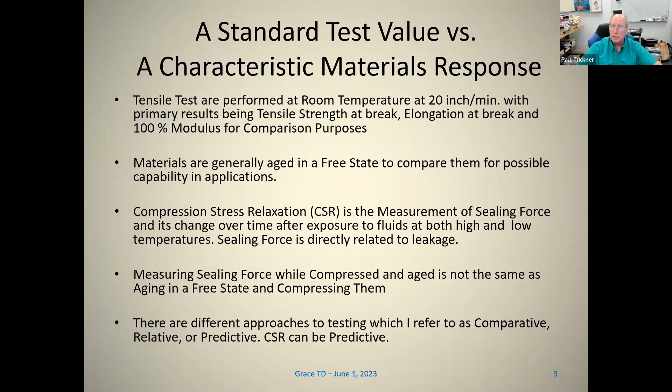One situation I'd like to raise with respect to static sealing, and I've worked in this industry for about 30, 40 years, is a static sealing perspective: you get a different perspective depending on who you are, whether you're a rubber chemist, a seal design engineer, an application engineer, or a materials engineer. Walk into a room, how would each approach a static sealing application or problem? And they will be different.

So I've worked as a rubber chemist and an application engineer and a materials engineer, but never worked as a seal design engineer, but worked with some of those people. So I know each of those people have a different perspective when it comes to sealing.

When you look at compression stress relaxation, there's two primary kinds. One is continuous CSR testing and the other is discrete CSR testing. The simplest version of continuous CSR testing would be testing with a load frame and an environmental chamber, or you can use a continuous CSR tester that has separate cells that you can put in a temperature chamber, and I'll talk about that specifically.

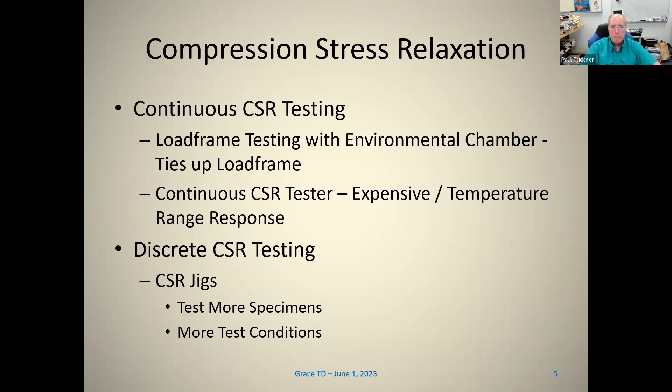And then you have discrete CSR jigs where you put a specimen inside a jig and you test them at specific intervals using different techniques to note how that sealing force changes as a function of time. One advantage of discrete jigs is that you can test more specimens under more conditions as compared to the other ones.

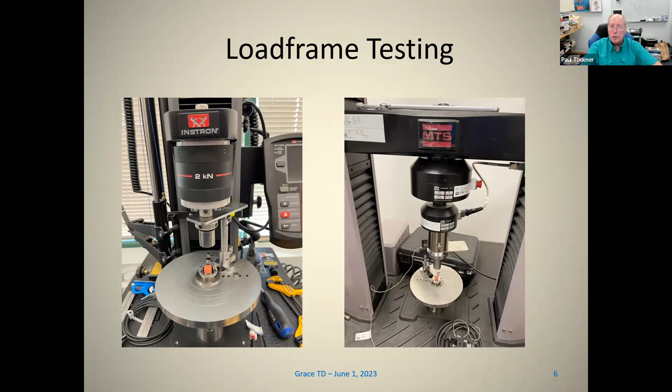Now this is a typical load frame setup in my lab. I have an Instron and an MTS machine. And if you wanted to compress a test specimen on a pedestal like that, you could do that and run the test like that. If you had an environmental chamber around those configurations, you could do it at different temperatures also.

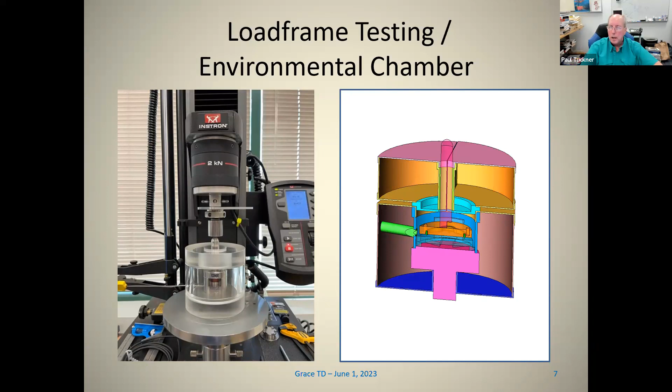Here's a case where I've developed two small environmental chambers. One is actually a high temperature chamber where you can take a jig and put it in this chamber. It's an insulated quartz chamber, and then do load deflection curves as it's cooling down, and I'll show that in a second. The other is a controlled temperature chamber that has conditioned air fed in, and then you can check the sealing force on the seal in that configuration. And that's also a configuration you can use to check for leakage, and I'll talk about that in a second.

So here's another picture of the high temperature chamber where you would take a jig out of the oven, place it in the quartz chamber, insert a thermocouple into the CSR jig, put the indenter pin in, and just run the CSR test like you would normally at room temperature. But if you can monitor the temperature as the jig cools, you can do load deflection curves and then determine what the sealing force is and see how it changes as a function of time.

This is a picture of the temperature chamber where I did a study and actually evaluated the difference in percent sealing force versus percent compression over a low temperature range. So the material was put in there, it was compressed at room temperature, allowed to sit for 30 minutes, and then it was cooled down at a given rate to low temperature to note the sealing force. And then the inside of that chamber was pressurized with air to note when there was flow. So there was a flow sensor in there, so you could tell whenever there was leakage, the flow would begin to show.

So what it shows is that at lower compression, not only do you have lower sealing force, but you actually lose sealing force at a higher temperature. So it doesn't seal to as low a temperature as it does at the higher compression. The other thing it shows is that the leakage occurs at the point where the effective sealing force is zero. So you can see that in each of these cases the leakage occurs when sealing force is lost.

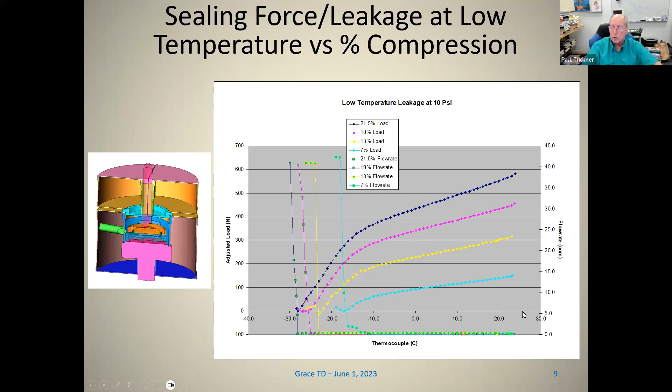This is a graph that I put together that I call the viscoelastic response cycle. And what it really does, it shows what happens to sealing force if you're doing continuous readings and the related discrete readings that would come in. So in the first part, if you take a specimen and you compress it at room temperature, it would be a simple compression up to a given point of strain.

If you hold it at that point of strain, then you see the relaxation curve. So in the relaxation curve over a period of 60 minutes, you would get to this point. So after 60 minutes of relaxation, that value is the initial value used if you're doing discrete CSR testing. Then if you were to heat it up to elevated temperature, you'll see that the sealing force will increase to a point.

When you stabilize at a high temperature, it'll begin to show relaxation at that point. And then if you cool it back down, you'll come to a point which will have a sealing force lower than your initial drop that you had with the initial relaxation. And this has to do with the high temperature relaxation that occurs just from exposure to the high temperature.

And this value is something you can test with discrete jigs by, after you do the initial sealing force check, you can put it in the oven for 1 hour, take it out, allow it to cool, and then check the sealing force again. So whether you do this continuously or do this with discrete jigs, as long as you follow these same positions, you should get the same number.

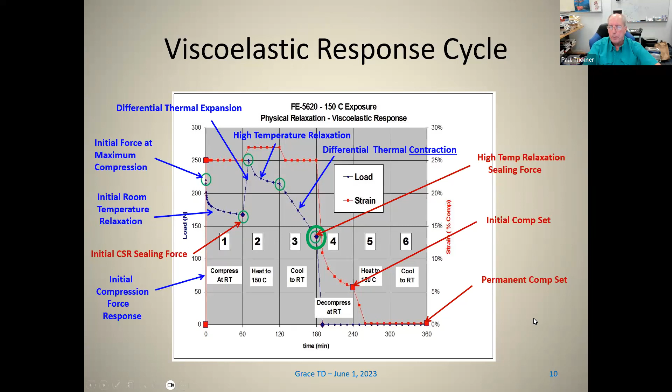One of the things that people don't understand or don't talk about is what I call differential thermal expansion and effective percent compression. So if you look at some of these configurations, this is considered a series compression, and this is a thing called statically indeterminate. So if these two are locked in position and you heat this up, what you'll find out is the stiffer material will compress the less stiff material, and you'll get a value. And this is a parallel constrained configuration where you're working with two of them.

Now, if you actually do continuous testing, you typically have a series constrained configuration. So the amount of compression that actually occurs here will depend on the length of the compressing surfaces, their stiffness, and their thermal expansion. In most applications for sealing, you really have a parallel configuration, which is what you see in a discrete thing. So you have to understand that if you're doing continuous versus discrete testing, you might not get the same values unless you have matched thermal expansions and distances to compare.

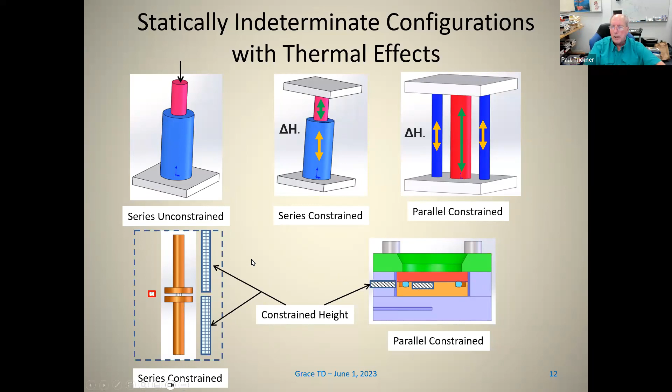Now, for continuous testing, this would be a standard test piece of equipment. This is the Elastocon, and they have newer ones now that have more cells. So this one has 3 cells. They have ones that have more cells. This is just a heated controlled chamber. They now have ones that can both heat and cool. And one of the advantages of this is that you can follow multiple specimens over a temperature range up and down, and it gives you really good values.

For discrete jigs, there are several different ones, and the first one I was familiar with was a Lucas stress relaxometer. And that was like in 1980 when I first saw that. And that used an electrical contact brake configuration. And then later on, I got involved in the Shawbury-Wallace, both the tester and the jigs. And now they have the Wallace tester with the Wallace jigs with the new tester. And those are both electrical contact brake.

Then there was the Wykeham Farrance jig, which had its own tester. And then there's the Jones-Odom jig, which Ford was using some time back, and the JMAC jig, which Chrysler was using. And then I developed Grace Technology jigs and fixtures when I was at Dyneon 3M at the time. And that can use both the electrical contact and load deflection.

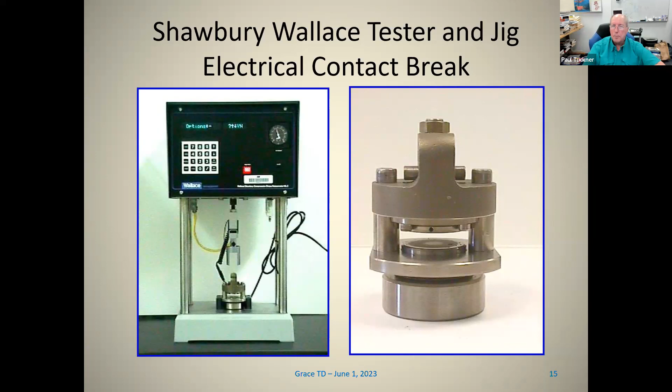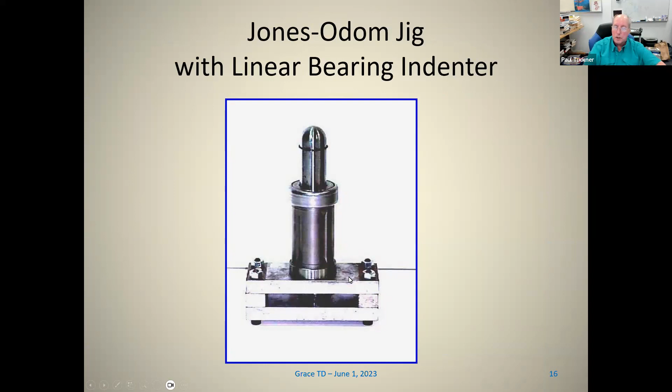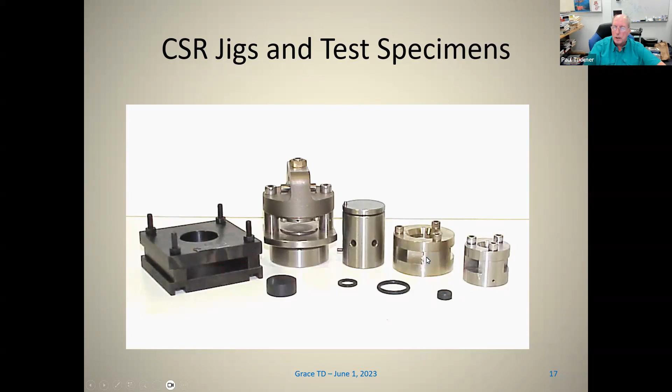So by comparison, this is a newer design of the Jones-Odom jig, but it's still pretty large. This is the Shawbury-Wallace jig. This is the JMAC jig. And this is the Grace Technology and Development O-ring jig. And this is the ASD jig. So you can see that as you work from left to right, you get smaller jigs and you can test different kinds of specimens.

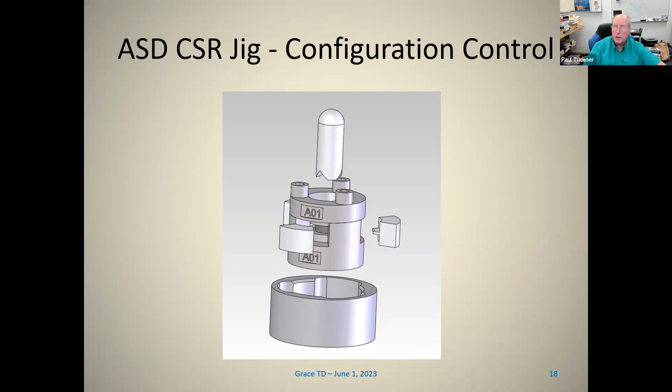So one of the unique things about the ASD jig is they use a centering feature which uses wedges and a centering cup, which centers both the shims and the specimen in the jig, which is important. And then I developed an indenter pin, which has a tripod base and a hemispherical head, and it's hardened so that it works really nice to accommodate off-perpendicular loading in your test configuration. And nobody had really done that, and it really makes a difference in the quality of your load deflection responses.

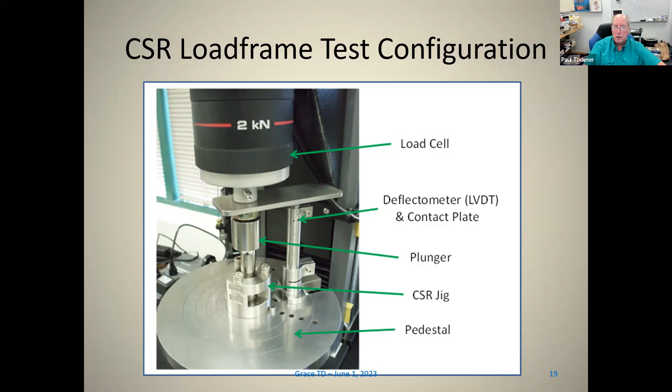So one thing you get out of this is if you take the ratio of the system stiffness and the sample stiffness, which are the slopes of the two, you get what's known as a stiffness ratio. So what I say when you do CSR testing is you want to have a stiffness ratio that's greater than 5. And if you have a stiffness ratio that's between 2 and 5, then you need to note that. And depending on how linear your response is and the quality of your inflection region, you may be able to say that, okay, this is good and I still have a valid value.

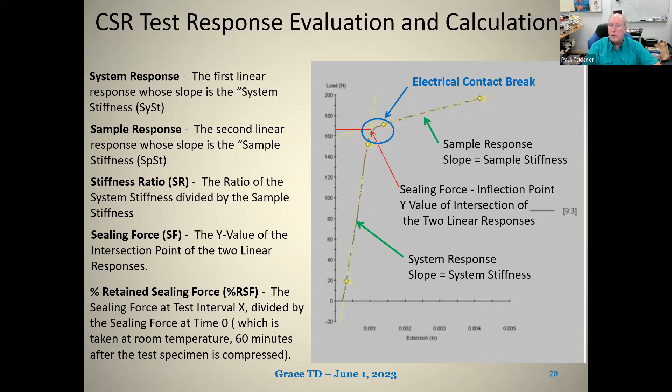If the stiffness ratio is less than 2, I say that you can't really say with any certainty that those values are correct. And so if you're doing sample stiffness and you note that over the test period, you can see that the sample stiffness may change. Some materials that age by diffusion-limited oxidation will have an increase in sample stiffness over the testing period. Let's say if you're doing nitrile testing aged in air, you'll see that sample stiffness increase. And at some point during the testing, you may find that your stiffness ratio gets too low that you can't see an inflection point. So having a good load deflection curve response and knowing what that means is really important in getting good CSR results.

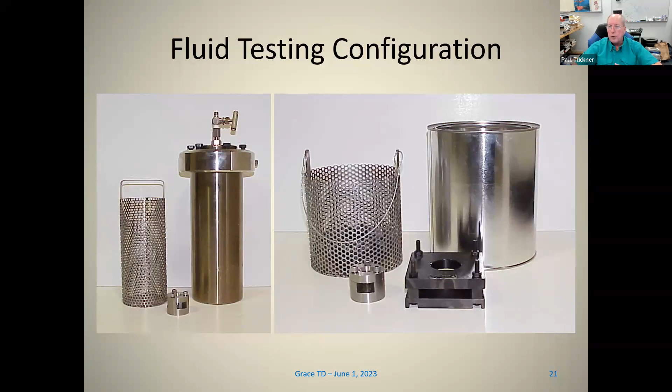controller, when you come to the time intervals, you cool the vessel down, you pull the basket out, and then you let all the fluids drain back into the vessel. And then you can pull the jigs out, wipe them down, put them in front of a fan and cool them and run the CSR test. So it's a real efficient and effective way to do CSR.

The biggest thing about CSR testing is that you can't get any better quality of results than the quality of your load deflection curves. And I've seen some cases where the load deflection curves are really bad. They're not linear, they're curved, they have peaks all over the place or things like that. So you can't trust things like that. And I'll talk about that later about quality of the test system.

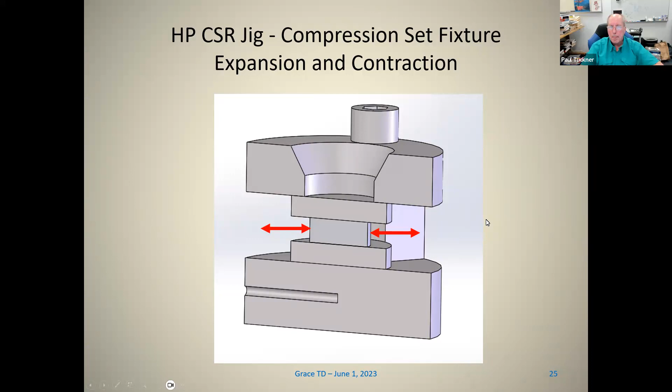So one thing I developed along with CSR testing is actually 4 different compression set values, which give you some additional information about what's happening in the CSR test. So the first one I did I call the shim set. And the shim set is where you remove the specimen from the CSR jig in contact with the shims, and then you measure the thickness of both the shims and the test specimen, and then you subtract the thickness of the shims to determine what the compressed thickness of the specimen is in contact with the shims.

Then at that point, you separate the shims from the specimen and note the adhesion that you have, because that's important. And then you let the specimen sit for 30 minutes at room temperature to recover. Then you measure it at that point. And then you put it back in the oven at the test temperature for 60 minutes. And then you take it out of the oven, let it cool back to room temperature for 30 minutes, and you check it again.

And that's what I call the permanent set, which is a standard compression set kind of test. And then what you do is you take a digital caliper and you measure the thickness at the edge of the specimen. And that's what I call the edge set. So for materials that age non-uniformly by diffusion limited oxidation, you find that the edge set is greater than the permanent set. So it gives you some indication of the uniformity of degradation.

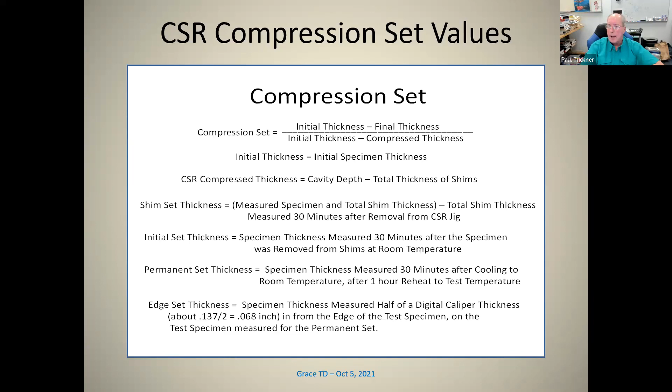So all of these 4 different compression set values are useful to give you some information on what's happening with the specimen in the CSR jig. So what you can do is you can do this at the end of the test, but if you want, you can add additional jigs you can take off test at the different intervals. And when you do that, you can see the progression of all 4 of the different compression set values. And you can do that along with the CSR testing you do, because you'll have more additional values.

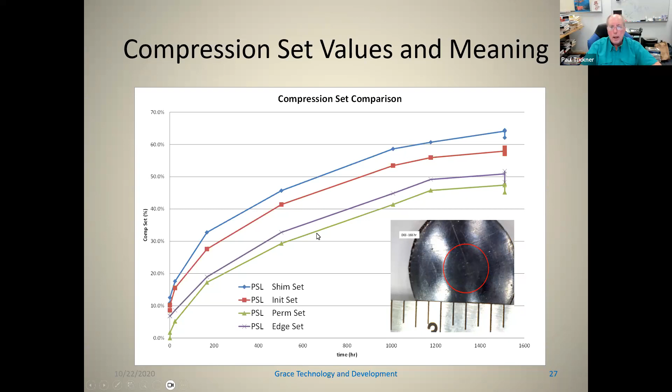So you'll see that the shim set is the highest, then the initial set. And then what you'll find is that the edge set is typically higher than what the permanent set is. And then if you take and plot the shim set and the permanent set values against the CSR values, you can get a linear regression, and you can see that for the shim set values, the intercept point is near 100%. So it shows that when your shim set is 100%, it coincides with 0 sealing force. So being able to have both of these gives you some information on what's happening. And sometimes if the degradation is not uniform, it skews some of these values.

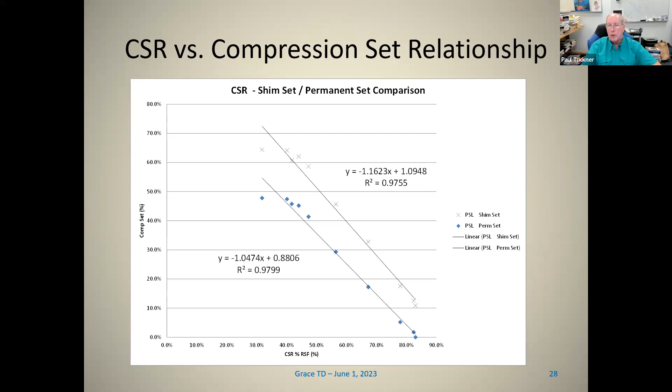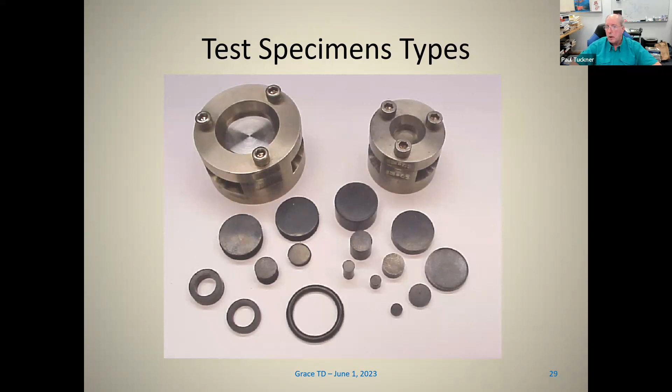Another thing you can do is you can do configuration testing. So this is some work I did about 20 years ago where I evaluated different size specimens and shapes and compared them. So you can look at the effect of size, shape, and percent compression on the CSR response. And in this case, when I was doing FKM testing, I showed that specimens with the same shape factor, which is a ratio of diameter to thickness, they all had the same retained sealing force. And specimens that had high shape factors, which were large diameter, small thickness, had poorer retention of sealing force. And the ones that were taller with smaller diameter had better. So it gives you some idea of the effect of shape and size on that.

Additionally, you can do the effect of percent compression to determine the optimum percent compression. So in this case, it shows the percent retained sealing force, and it shows that at low percent compression, you get lower sealing force, which makes sense, but you actually lose it faster. In that intermediate region, you have the best retention of sealing force. And at high percent compressions, you have higher sealing force, but you lose it faster. So at some point, you end up having less sealing force than what you would at an intermediate range. So from that, it gives you some idea of how to optimize percent compression. And that depends on material, max temperature, and fluid exposure you're dealing with. So each of those will affect that.

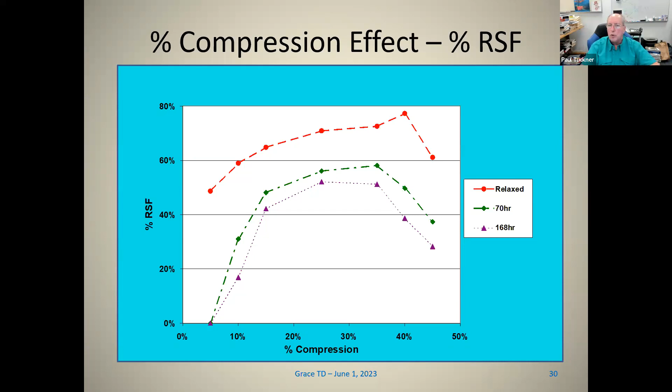The third thing is mode of degradation. So in this case, I noted previously that if you had specimens that had the same shape factor, but different diameters and heights, you should get the same percent retained sealing force. But in this case, with some orange HNBR specimens, you could see that they degraded from the outside in by turning black, but it's a larger percentage of the small one than it is of the large one. So you'd find that the percent retained sealing force was best for the larger specimen and worse for the smallest one.

And if you did this same thing with O-rings, you'd find that O-rings of the same diameter that were thicker would have better retained sealing force than ones that were thinner. If you had a material that aged uniformly, you'd find that the values are pretty much the same. So it's really important that you know the mode of degradation and how it affects percent retained sealing force. In this case, you could see a button that was actually domed in the center. So you could see that the edge set was much higher.

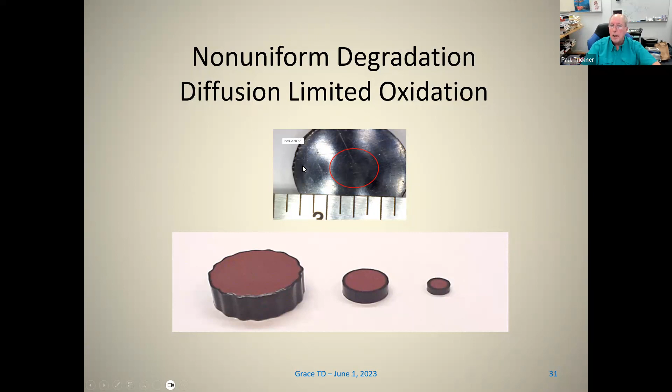When you talk about CSR test standards, there's pretty much three primary standards. So there's ASTM D6147, and then there's ISO 3384, both part 1 and part 2. And then there's SAE J2979. Of these three, the J2979 is the only one that actually tells you how to determine sealing force.

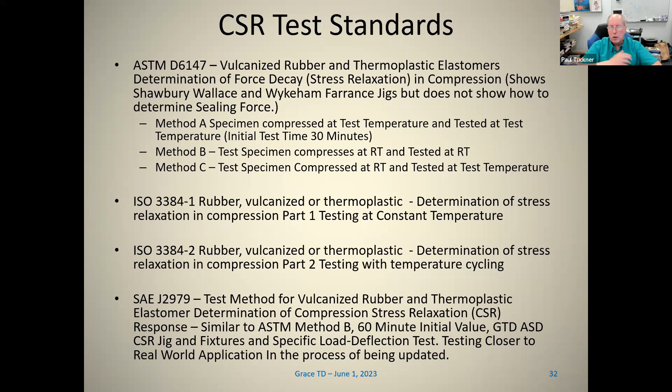And again, I want to reiterate the difference between a standard test value versus a characteristic material response. I developed a concept a couple of years ago, which I call precision CSR testing. The quality of the CSR results will depend on the quality of your CSR test system and its limitations. So these are some of the questions I discuss. Is your load frame or CSR tester capable? And there's approaches that I use to look at that.

And is your test software capable? I use a certain approach both with MTS TestWorks and the Instron Bluehill 3 that works very nicely. And are your load frame fixtures capable? Are your CSR jigs and test fixtures capable? Is your procedure capable? And are your test engineers knowledgeable?

A lot of times test engineers are responsible for the CSR testing, but they don't do the testing. They have technicians that do it, and they may or may not give them the information they need in order to assess the CSR properly.

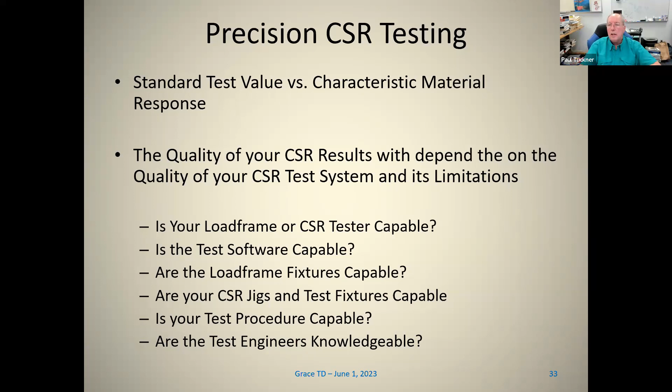The people that deal with CSR are people that are concerned about long-term performance under high temperature and fluid exposure conditions, where failure can result in high cost or loss of life. And it has to do with trying to understand the capability and service life of not just the materials, but the designs they're using. It's primarily used in automotive for GM, Ford, Chrysler, and aerospace.

I've done work with Wright-Patterson Air Force, UDRI, and the SAE committee. And then in the oil and gas business, I work with Baker Hughes and Schlumberger and a few other people. Semiconductor, which is a huge thing that I don't think really uses CSR right now, but when they're doing fab situations, if they get a leak in the fab and they ruin a whole big disk, it's very expensive. And then in cases where there's industrial applications.

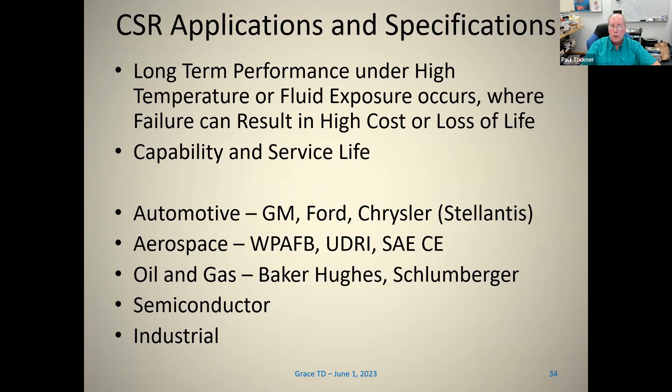So the things that I look at for CSR is not just the testing, but testing in a way you can integrate material properties into design, to define capability and service life. So you're looking at the full material response in compression, the characteristic material response, which is the stress strain response, being able to differentiate the viscoelastic response from degradation effects. Usually the first change in sealing force is primarily due to the viscoelastic response. And then the later part is degradation. And in between, you have a little bit of both.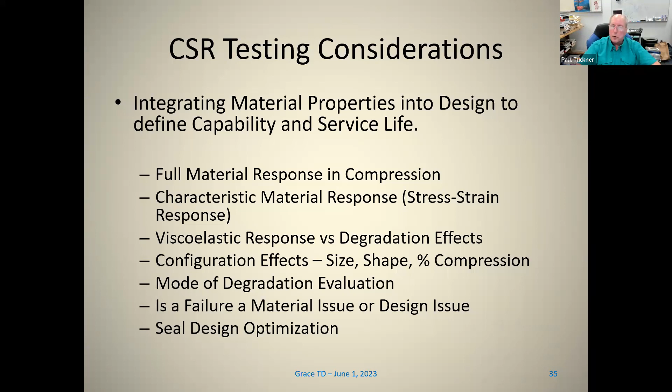And then I talked a little bit about the configuration effects, which has to do with design, and that has to do with size, shape, and percent compression. And then understanding the mode of degradation and doing an evaluation for that. And understanding, when you have a failure, is it a material issue or a design issue, and doing seal optimization.

So in conclusion, nobody really cares about materials, designs, or testing until you have a big, expensive, or critical failure or loss of life. Then it becomes an issue. CSR can be considered just another compression set test, but then it can only be used as a value for comparison. When performed with good equipment, knowledgeable operators, and good controls, full or expanded CSR testing provides good information which allows you to optimize a design and predict capability and service life.